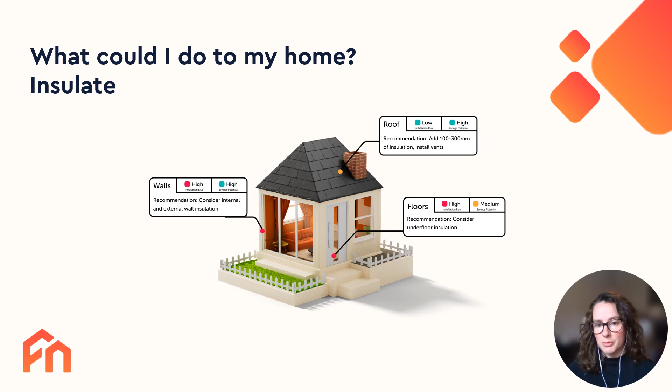Most of the technologies are already there. So first of all, we start with looking at insulating. We look at your roof, floors, walls, what the opportunities are there. We make sure we pair it alongside ventilation to make sure there's no moisture build-up problems, and we're really making sure you've got a healthy home in the longer run.

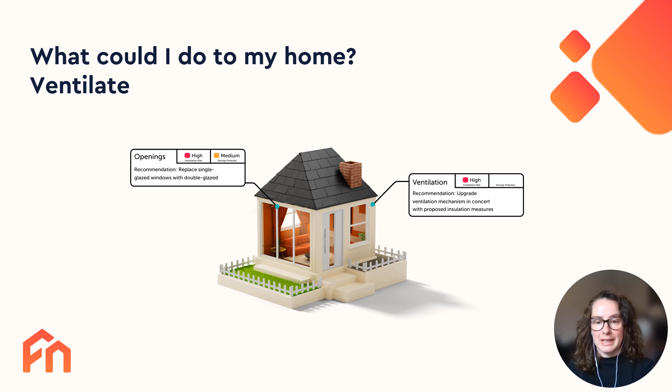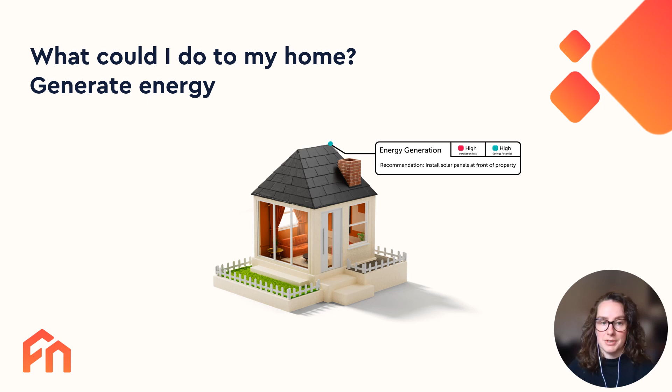Then we look at opportunities to generate energy or store it at home. So that could be solar panels, it could be solar thermal. You might be looking at opportunities for thermal storage or battery storage as well, but making sure it's suitable for your home and at the right time. And then last but not least is switching to a low carbon heating system, ultimately just future proofing your home for the long run.

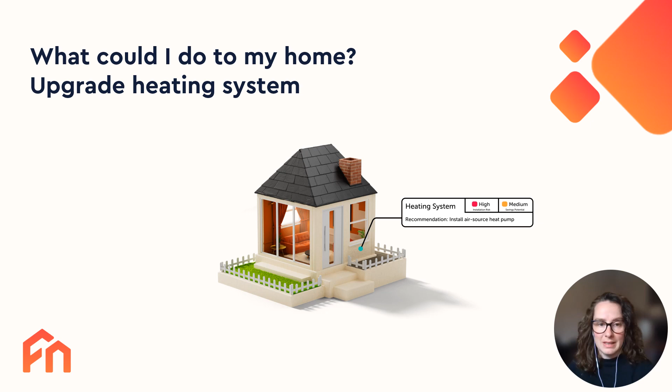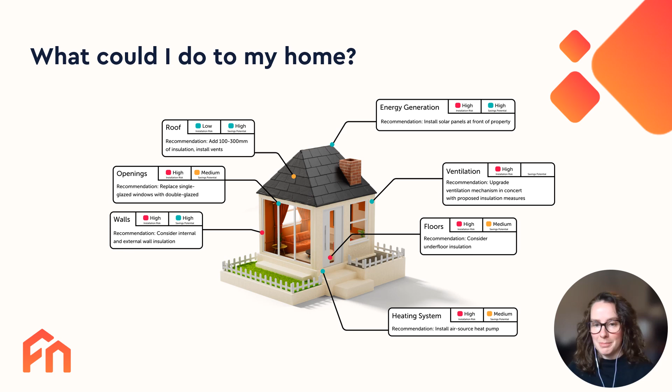But when it comes to tackling some of those bigger issues in the home, whether that be around solid wall insulation that needs to be done, insulating the floors, or maybe changing your heating system, it needs a bit more planning and making sure it fits in with other home renovations at the same time as well. And that's kind of what we're experts in.

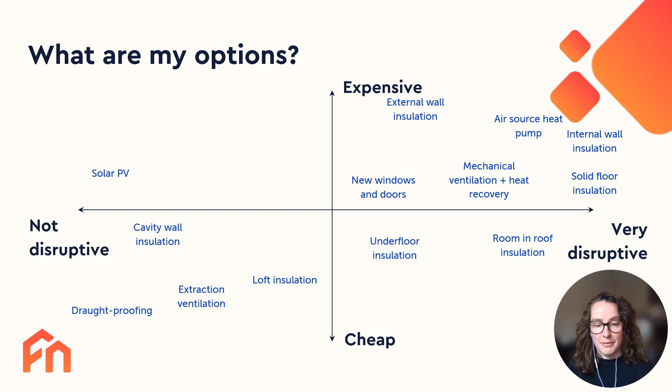So I'll run through a little bit about the process, and then I'll talk a bit about how we've been working with Birmingham in the area to help provide a more well-rounded offer to those who don't have any support through the grant programmes. So with Furbnow, how does the energy improvement process look? First of all, we break it down into three really easy steps.

First of all, we start with a plan, a home energy plan. I'll go into a bit of detail about all these in a second as well. This is basically making sure you understand all the different areas of your home and making sure that we can take what's called a whole house approach.

Then when we have the detail, we know exactly what it is we're going to do, we do that design work to make sure the materials or the systems that are being installed are spec'd specifically to your home. And then finally, when it's ready, we've got everything in place, we install, and then we hand over and commission at the end. A little bit about we take that whole home approach.

So right at the start, I spoke a little bit about the different measures that are appropriate. And it might make sense to do one before the other. You could be looking at other opportunities, maybe extending, maybe redoing a bathroom or something similar. And all of these parts of home improvements need to be taken into consideration.

Not last, but also inside of that as well, is if you do one particular measure, there could be an unintended consequence from that at the same time. So for example, if you seal up any drafts, you could actually be affecting the indoor air quality of your home.

Although you're reducing heat loss from drafts, you're actually causing too much of a buildup of moisture in your home. So although it might seem like a good idea to go one route, we're making sure we catch all and avoid unintended consequences in the longer run. Also, if we take that bigger view of the whole home and the plans you have for it, you might find it's ultimately cheaper to do that work.

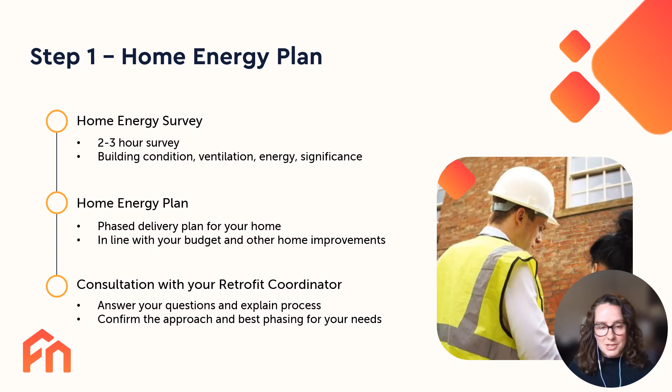And if you want to proceed, you've got a couple of options here as well if you want to continue with Furbnow. So option A is what we call DIY, so you can carry on with the design work and installations. You can find those installers yourself. That home energy plan is for you to go forward with.

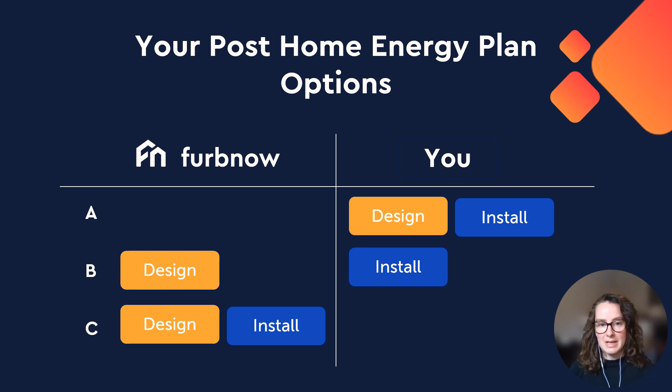If you need a little bit of help, there's option B, where we'll support you with the design and tendering process, which I'll go into in a second, basically setting your project up for success, but then you can carry on with the installation and project managing that as well. And if you're doing a bigger project and need more help coordinating those trades, we can do the design and tendering work but also manage everything on site as well. So once you've got that home energy plan, there's a few options for you to choose from.

If you could decide to go through with the design stage, this is kind of how we recommend doing it, even if you're going through with the work yourself. So first is to confirm what the scope of work is.

We already have detailed measurements and understanding of the U values or any air pressure, air quality requirements in your home. That helps us confirm that scope of work, which we take out to tender with our contractors. We're making sure that all the design factors are included, so things we might have picked up in the significance survey, limitations to the property or conservation, everything is included in that scope of work.

We then go out to our vetted contractor network, request quotes, at least 3 for each measure, and then we help advise you on those quotes as well. You're completely in the driving seat throughout all of that, but at least it gives you a feeling for what the market is and how different types of installers quote at different levels.

You then choose your installers. Your retrofit coordinator will be on hand to help advise you and think about what the implications are of those different quotes, and then after that, help you develop your installation plan.

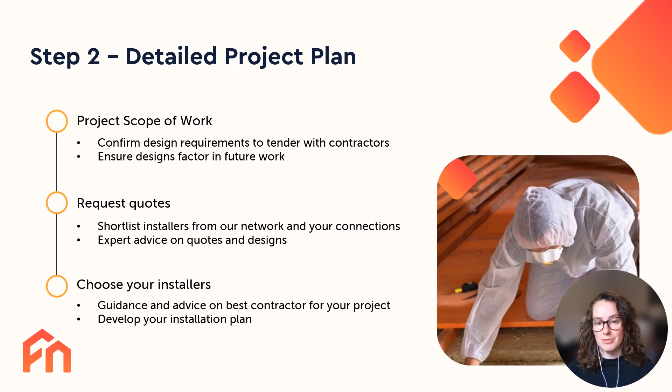This is particularly important if you have lots of different measures installed in your home. It means you know which ones to go first, what milestones go into your project plan. At the end of this stage, you're in a really good place to know exactly what's being installed, who's going to be doing the work, and exactly what your budget is going to be required to go ahead. Setting your project up for success and making sure you're really well prepared is everything in this stage.

When you're ready to get going, if you decide to proceed with Furbnow, this is how we can proceed as well. When you're ready to start, we just confirm that project plan, that the installers are available on the timeline, and you can see everything in your project dashboard, in your customer dashboard area.

When it comes to site visits, there's 2 options really. You might need daily site management, so we'll have one of our construction project managers on site to manage every day. This is particularly important if there's a really big construction project or home renovation, just to make sure things are being coordinated on site. If it's a little bit lighter touch, and obviously a little bit cheaper, then we just make sure we visit at key points in the project stages to make sure things are going as they should with the specification as it proceeds.

For example, good chance that at different stages in external wall insulation things might get covered up. If we visited at the end, we would have no idea what the quality of the installation of the insulation would be. So we just make sure that we have those site visits at key quality assurance stages throughout the process.

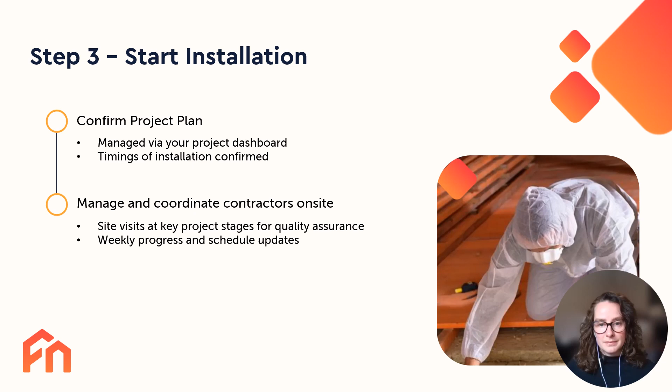And the final part, once it's all done, then we quality review and sign off. We'll just make sure that everything's needed is in one place - warranties, any building control inspections, everything in one place. So just make sure you have no issues in the future and you have all the documentation you need.

And then a final inspection from your retrofit coordinator as well, just to make sure everything is as it should be, ultimately giving you a warmer, healthier home that you can enjoy without the hassle. And that's everything that we've built. Every single stage in this process we've built with the customer in mind, making sure that it's as simple as possible for you and we can make sure the supply chain is delivering exactly what you're looking for in your home.

I just wanted to talk briefly about the work that we've done with Birmingham City Council. We ran a 3-month project, a trial with Birmingham City Council to help them develop their strategy for supporting every home across the city in improving their home energy efficiency.

We did quite a few experiments and are currently at the point of understanding how this will influence some comms strategy and also the wider programme of support in Birmingham. More to come on that in the future. I know Dan might have spoken about this a little bit before me as well, but happy to answer any questions about this and what we did.